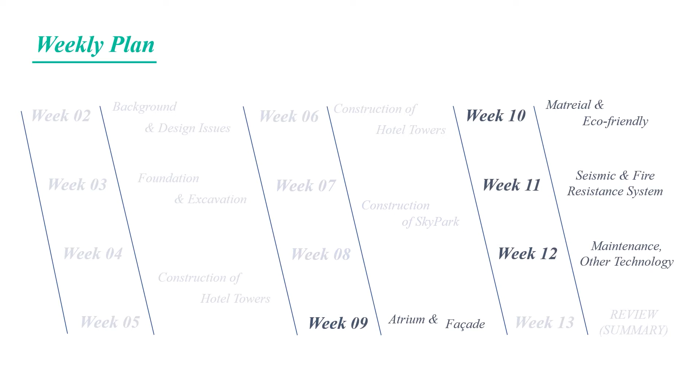In weeks 4 till 6 we'll talk about the construction of the hotel towers. Next, the construction of the sky park and other things such as the atrium, facade, material, etc. Finally, we review and summarize the project. However, this schedule can be changed depending on the progress.

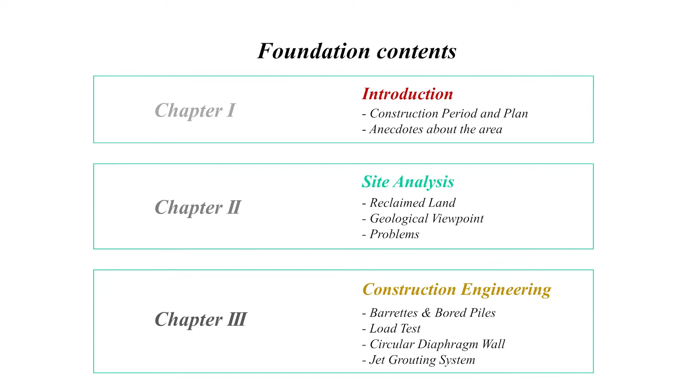This presentation consists of 3 chapters. Let's start with the introduction to the foundation and geotechnical aspects.

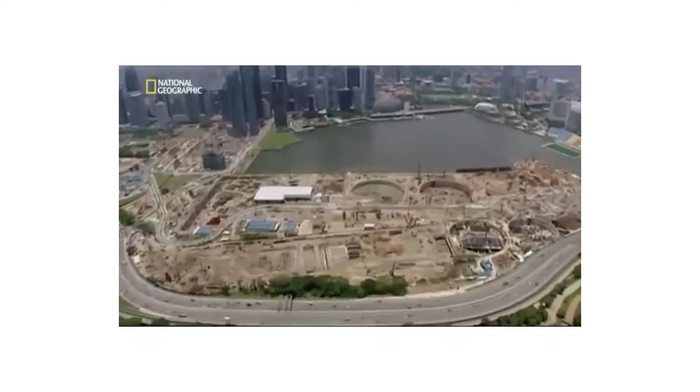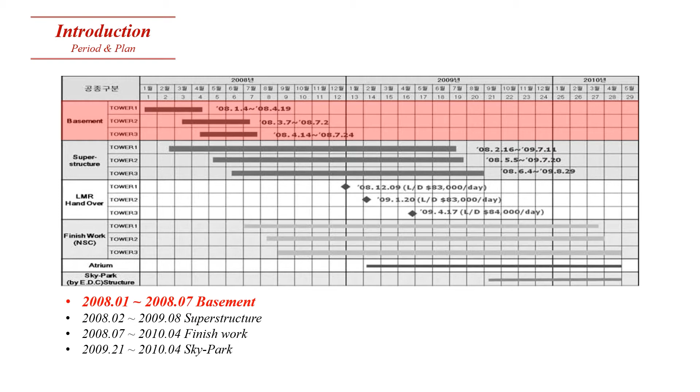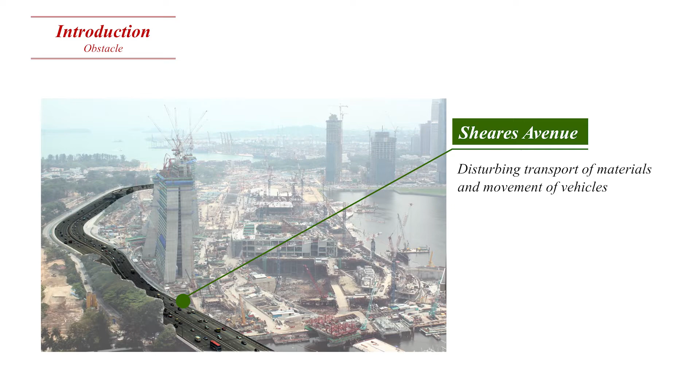As there was a highway located right next to the construction site, it was quite difficult to move construction vehicles and transport materials. Years before the construction of the Marina Bay Sands, there was a disaster for a project nearby,

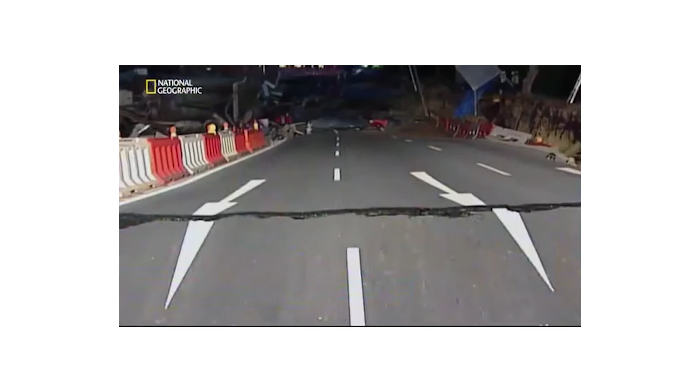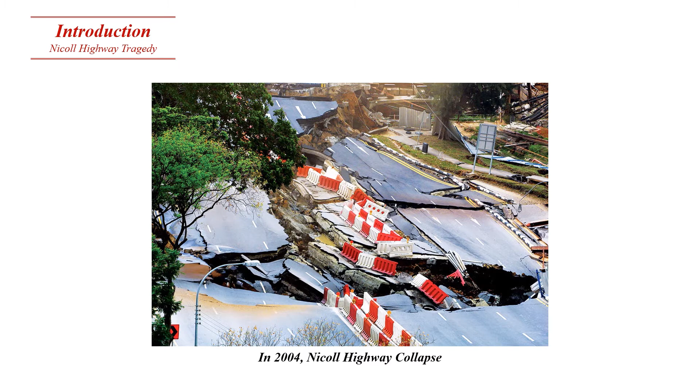the Nicoll Highway collapse. On the 20th of April 2004, the Nicoll Highway accident killed 4 construction workers and injured 3 others. It was caused by a tunnel excavation construction nearby and caused the collapse, creating a gaping hole in the Nicoll Highway. The reason of the collapse was because of the composition of the soil in Singapore.

The ground was made up of 40 meters of marine clay. This soft soil was too weak to support the heavy road and caused a lot of horizontal pressure. As construction progressed, movement of the soil occurred and eventually caused the struts of the construction to collapse, resulting in a lot of damage to the project, the loss of lives of the construction workers, and a lot of cost.

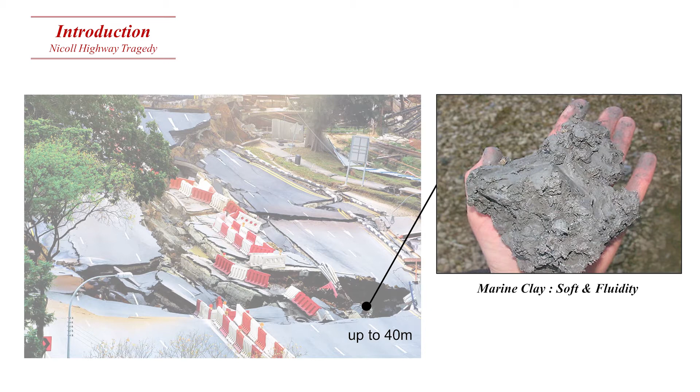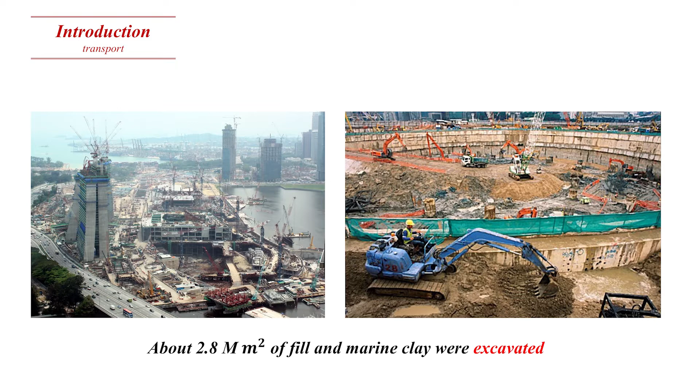This incident had alarmed the progress of the construction of the Marina Bay Sands, and as a result, during the excavation phase of the construction, about 2.8 million cubic meters of fill and marine clay were excavated from the site. This amounts to 800 trucks every day for the next 2 years.

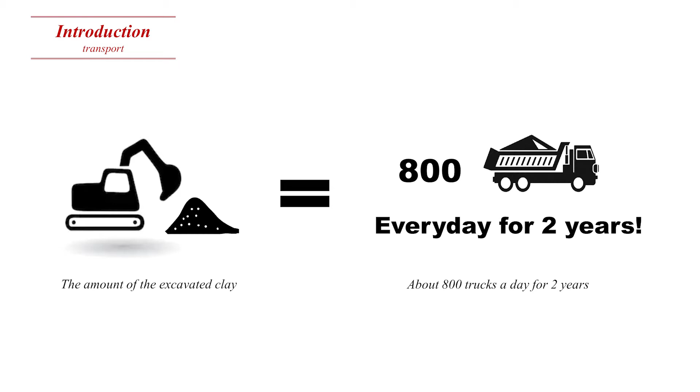Let's start with the site analysis. This project is located on reclaimed land, which is a land made by making embankments on the seashore and taking water out of it and filling it with soil.

The Marina Bay area had several phases of reclamation. The latest one was completed in the mid-1990s. The Marina Bay Sands sits on this latest reclamation zone, which led to many problems for the project's construction.

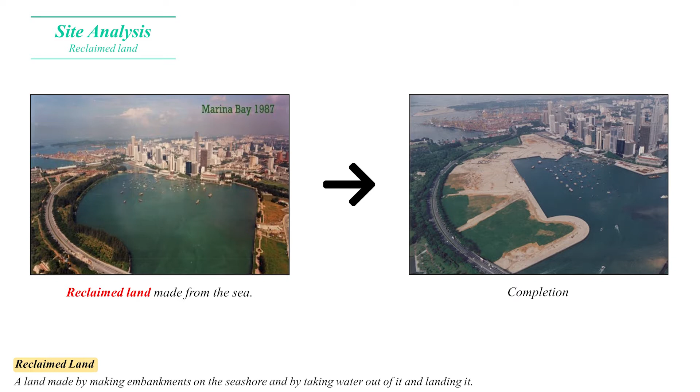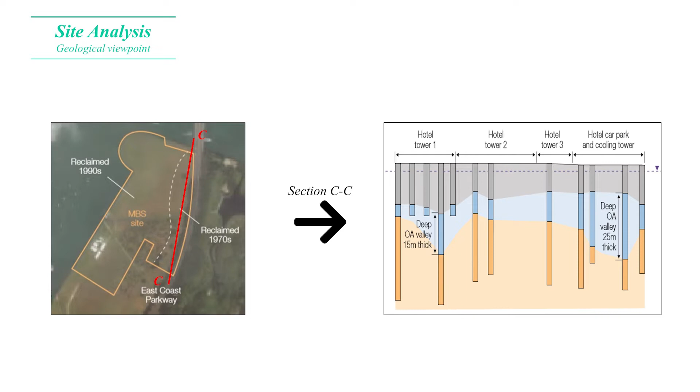Let's take a look at the site's geology here. The cross-section along the CC line, shown on the right, represents the soil profile of the hotel towers. The section consists of sand infill overlying soft marine clay above an underlying very stiff alluvium layer. The blue layer consists of soft clay called Kallang.

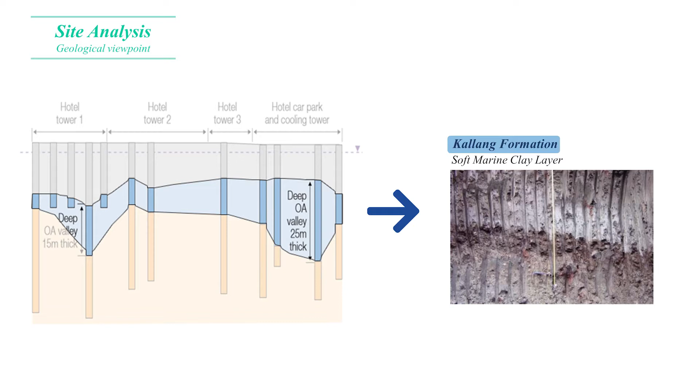It was too soft to support the huge weight and caused significant challenges to the excavation works. The bottom layer is the alluvium layer, which is a hard layer that was deposited over a long time under the weight of the marine clay layer and was suitable to support the weight of the structure.

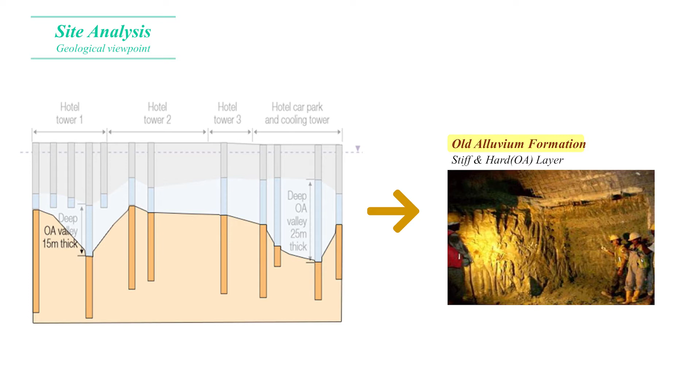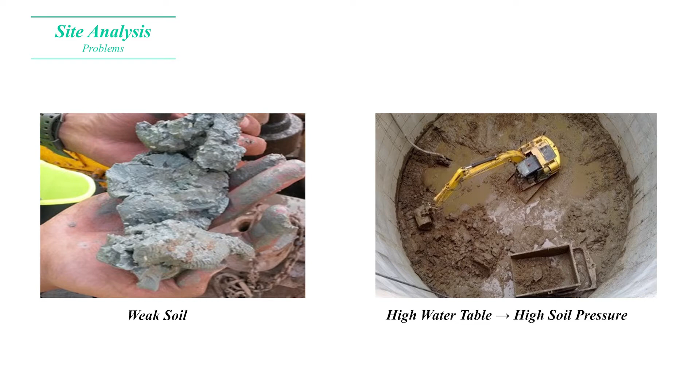In short, the Marina Bay Sands experienced the following problems during the excavation phase. 1. Weak soil. The ground was too weak because it was newly created. 2. High soil pressure. Due to the high water table, a high soil pressure was continuously applied during the construction of the foundation. Then, how to overcome both problems for the foundation construction.

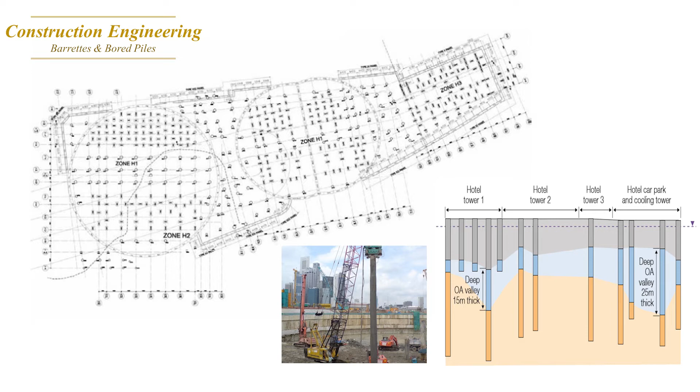To overcome the weak soil problem, a lot of barrettes and bored piles were inserted into the alluvium layer. Unlike the conditions in Korea where a 10-meter excavation would reveal the base rock, this site required the foundation to be 40 to 60 meters underneath the ground.

To confirm the load capacity of the pile and barrette foundation, the so-called Osterberg Cell, in short OCELL, technology test method was used. Load test programs using the OCELL method can confirm the load capacities.

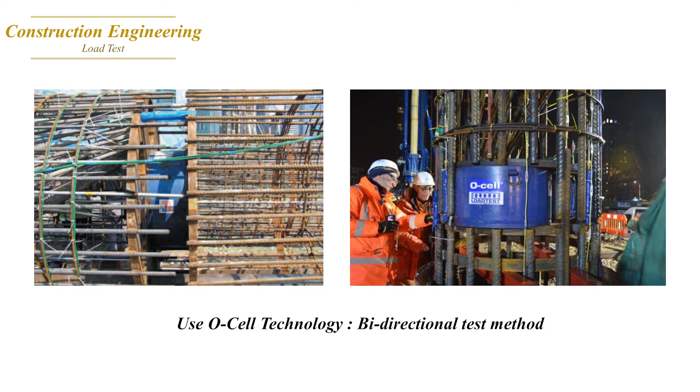The OCELL method was chosen for the following reasons: to confirm that the design loading requirements were being met, for its ability to isolate and load the foundation bearing strata, for its ability to separate the end bearing and skin friction components, and for its ability to provide high test loads even with deep foundation cutoff levels like 42.6 and 83.6 feet underneath the ground.

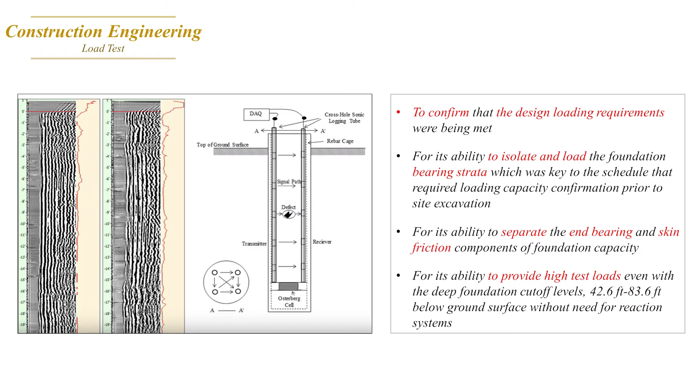This table compares the advantages of the bidirectional load test with the conventional method. It's a way to save money and time, and even check stability.

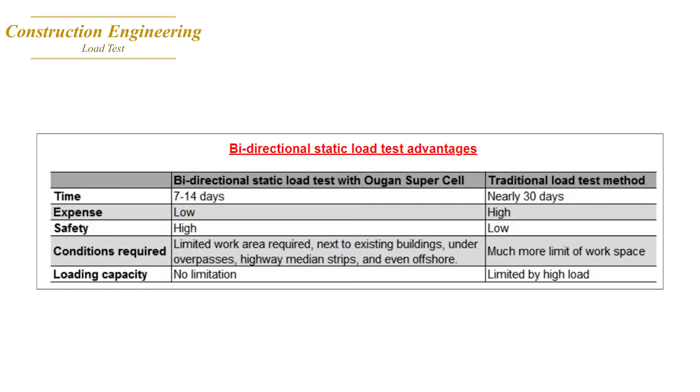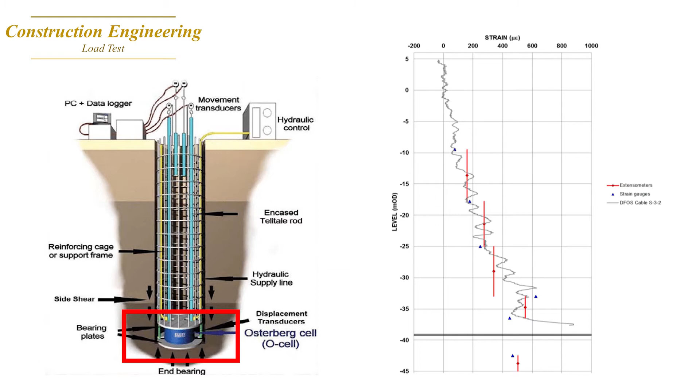The OCELL method works as follows. Before the reinforcement cage is placed in the pile or barrette, the cell plate and several sensors at different intervals are attached to the cage. After the foundation is completed, it's possible to monitor the actual behavior of the pile and confirm the loading capacity.

The next problem was the high soil pressure. In the excavation phase, a lot of temporary struts need to be used. However, struts make it difficult for excavation and construction. To overcome this problem, the engineers applied the circular diaphragm wall method.

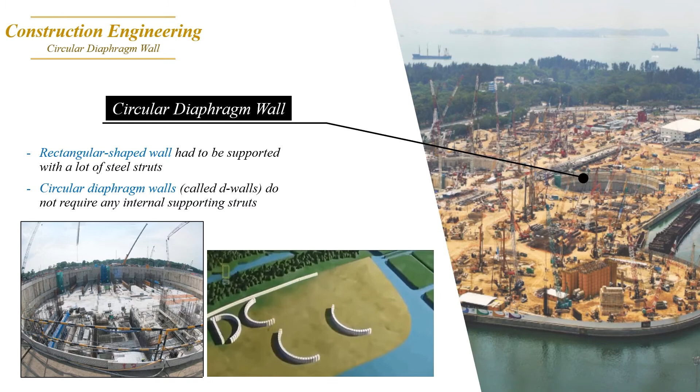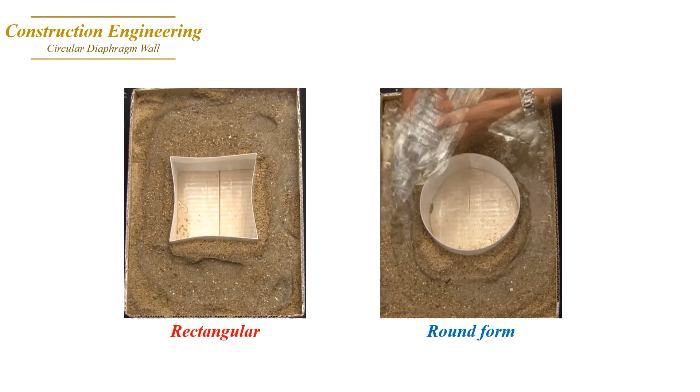Conventional rectangular shaped walls have to be supported with steel struts to prevent the wall from collapsing. However, this circular diaphragm wall didn't require any internal supporting struts. So this method can remove the temporary struts and reduce construction time.

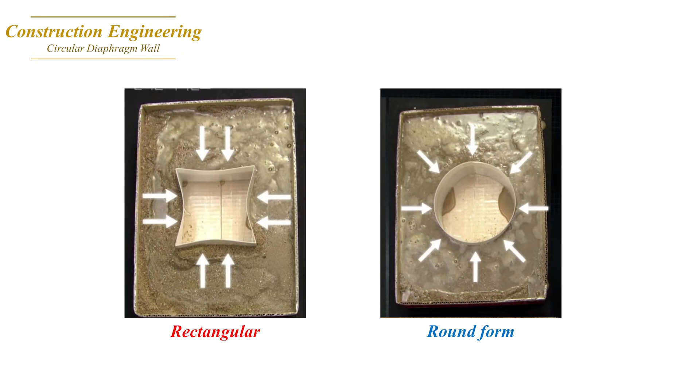This experiment shows that the round-shaped cofferdam is stronger against pressure than the square cofferdam. This is because, for circles, the force is evenly distributed along the wall.

The 120-meter diameter cofferdams were among the largest ever deployed in Singapore, and are notable for their excavation depth of 80 meters below the ground. They allowed work to progress across the site simultaneously, with the excavations to the north or south being able to be in advance of each other.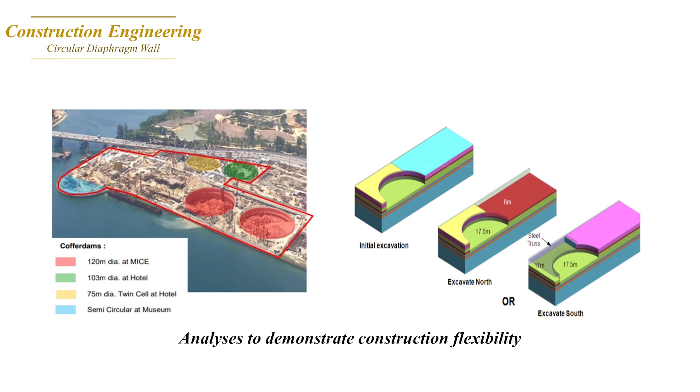Jet grouting is a ground improvement or soil stabilization method. It can provide convenient solutions for most geotechnical problems. So the engineers used this method for the Marina Bay Sands foundation.

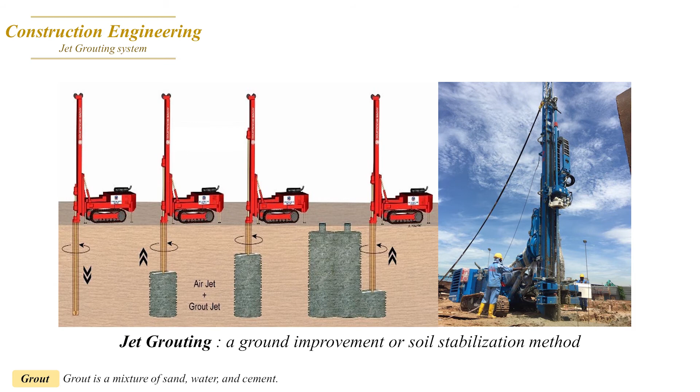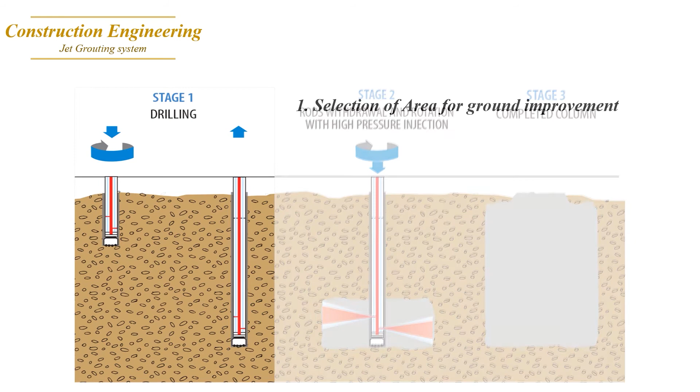The process of jet grouting is as follows. First, the area where the soil has to be treated is chosen and a hole is drilled into the required depth by a rotating drilling system under high pressure. Then the equipment is placed over the hole and the injection process is continued.

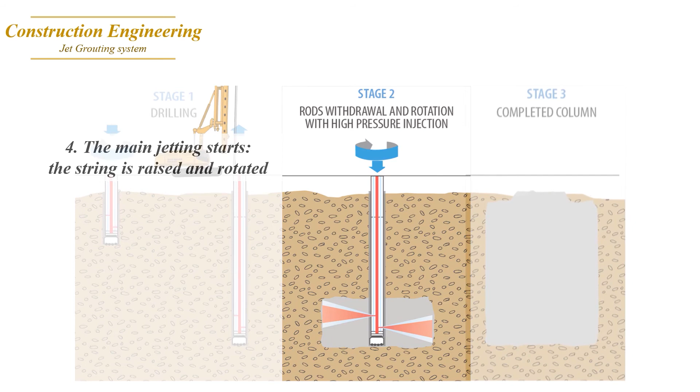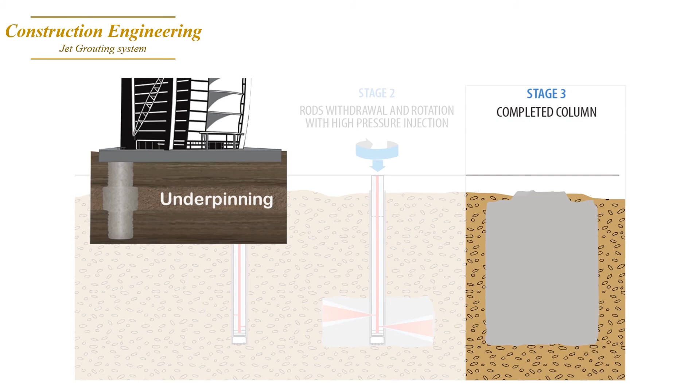Now the main jetting starts. The string is raised and rotated slowly to seal the wall column surface with a soil and fluid system. Then the grouted fluid is hardened within the soil, forming bodies called jet columns or jet grouted columns. The completed jet columns can act as horizontal barriers to control the groundwater, underpinning to stabilize foundation systems, and earth retaining systems.

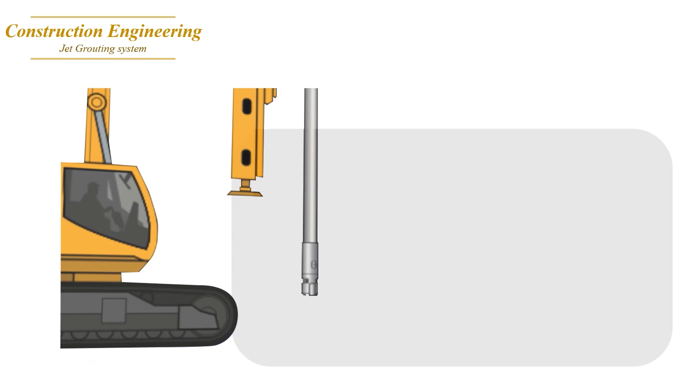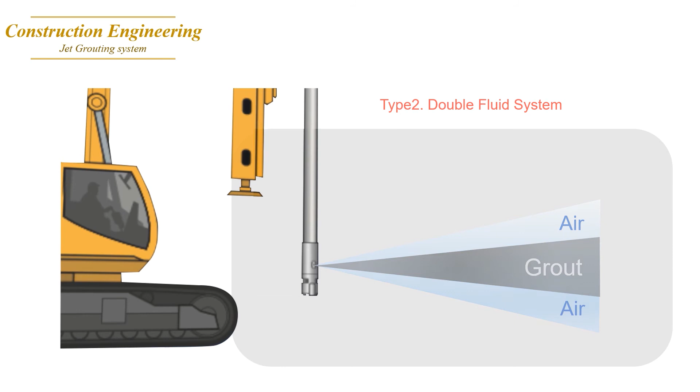Depending on the type of soil to be treated, one of three variations is used. Type 1: single fluid, grout plus water and cement. Type 2: double fluid, plus air plus grout. Type 3: triple fluid, plus water jet.

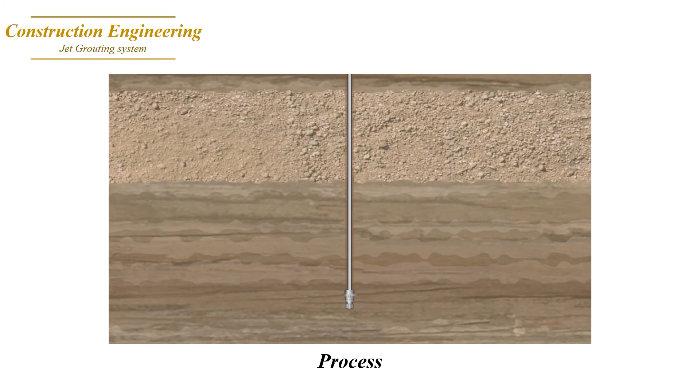Let's take a closer look. The drill system drills to the required design depth. The main jet starts and erodes the soil around the jet column. The method of jet grouting was used to create the circular diaphragm walls.

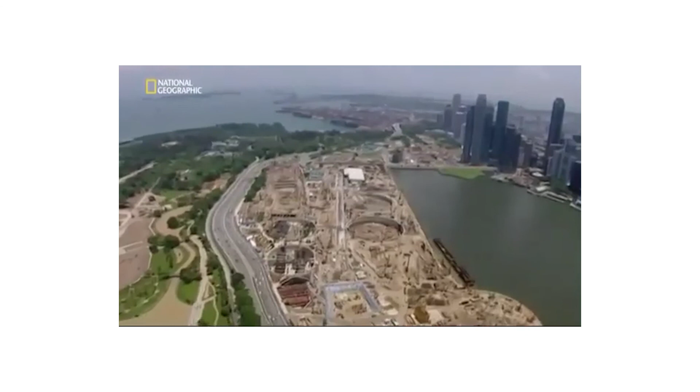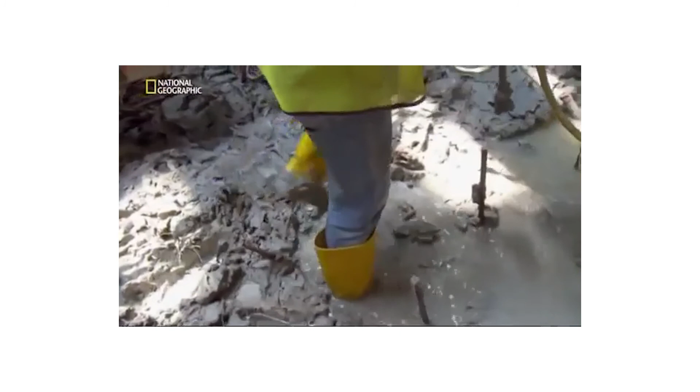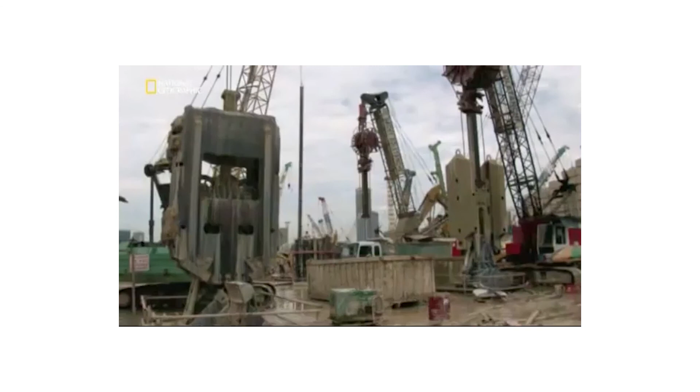This week, we discussed the foundation and excavation works for the Marina Bay Sands. The two largest problems for the foundation were the high soil pressure and the weak soil on the reclaimed land. In short, to overcome these problems, the engineers used circular diaphragm walls to make a large excavation to withstand the high soil pressure. And within the excavation, they constructed the foundation barrettes, piles, and basements to distribute the force into the hard alluvium layer.

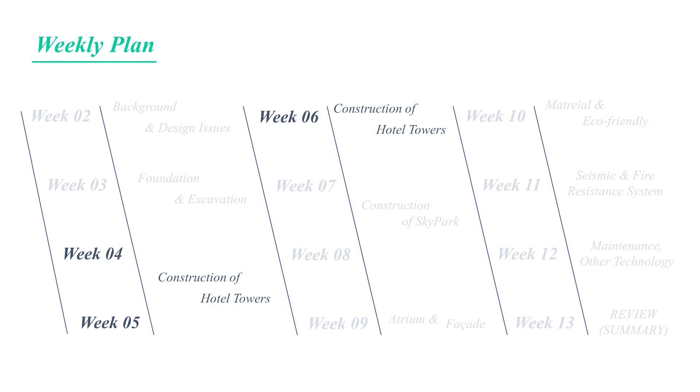Next week, we'll talk about the construction of the hotel tower. Thank you for watching.